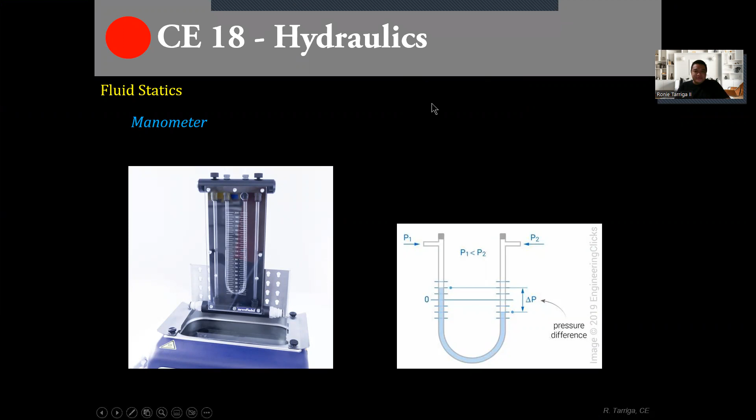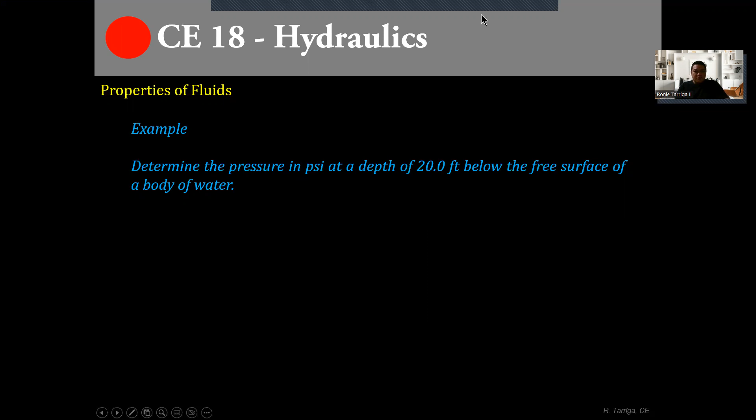Determine the pressure in PSI at a depth of 20 feet below the free surface of a body of water. Let's draw this. Suppose this is the free surface, and we take this point here, which is 20 feet down. This is our point, point 1.

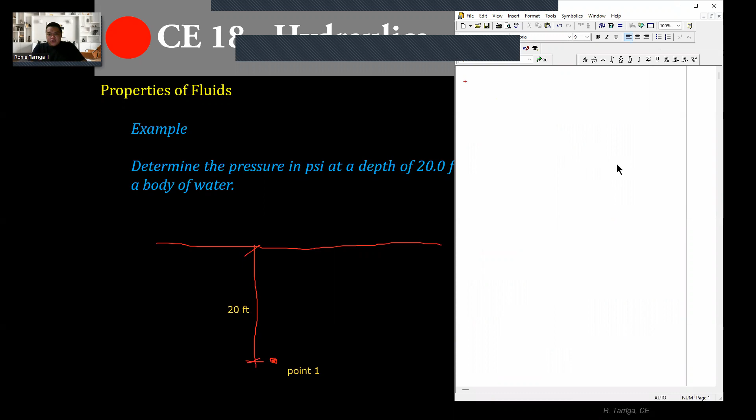Example 1. Determine the pressure in PSI. Come on, this is easy right? Pressure equals gamma times H, that's the formula.

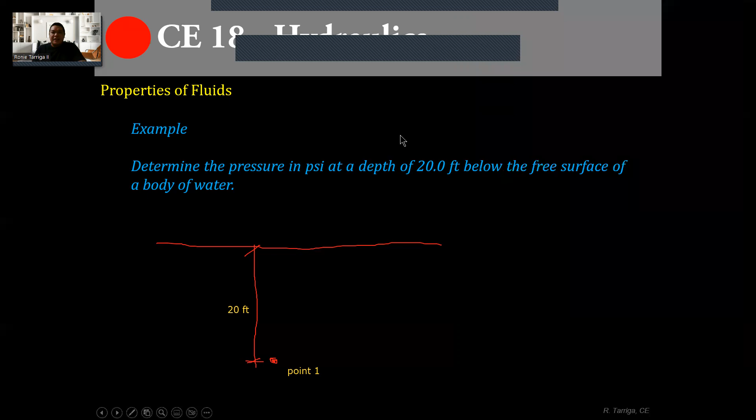Next: Determine the pressure at a depth of 9 meters in oil of specific gravity 0.75. B, find the absolute pressure in PSI in problem 2.3, when the barometer reads 29.9 inches of mercury, specific gravity 13.57. Example 2, let's put down the given.

For letter A, we need to get the pressure at a depth of 9 meters in oil of specific gravity 0.75. We can also draw this. Pressure formula is gamma times H. So H here is 9 meters.

For the gamma, we don't have it directly, but we have specific gravity of oil, 0.75. Where do we use this? If you remember, the formula for SG is the unit weight of the liquid over the unit weight of water. We use this to get the unit weight of oil, which equals specific gravity times the unit weight of water.

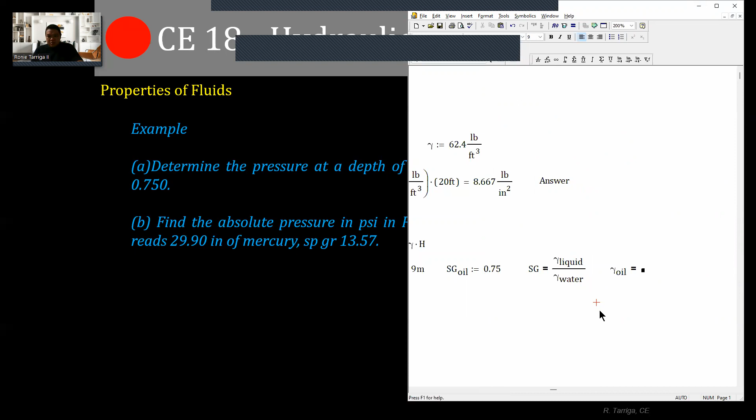Based on that, the unit weight of oil is the product of specific gravity times the unit weight of water. And you should remember the unit weight of water equals 9.81 kilonewton per cubic meter.

So let's use the formula. Specific gamma of oil equals SG of oil, 0.75, times unit weight of water, 9.81 kilonewton per cubic meter. Let's express it in kilonewton per cubic meter for now.

So now, determine the pressure at a depth of 9 meters using this formula. Pressure equals, for oil, unit weight of oil which is 7.357 kilonewton per cubic meter, times the height of 9 meters. Let's express this in kilopascal.

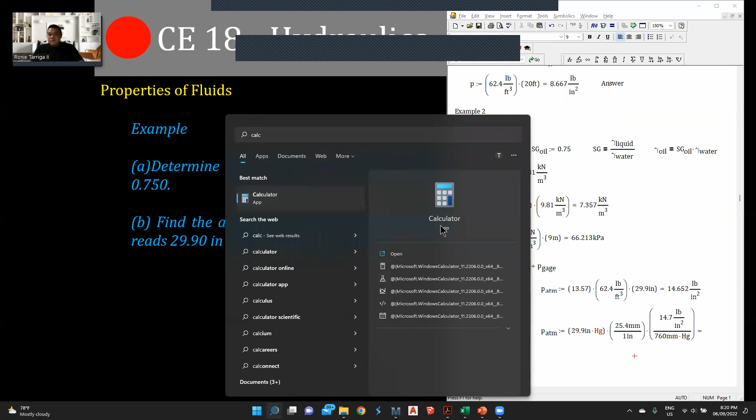Wala man tayo scientific, so i-multiply na lang nato tanan na sa numerator, divide by 760. 29.9 times 25.4 times 14.7 divided by 760. O di ba? 14.689, so paano na siya? Most likely, same. Equal to 14.689 pound per square inch.

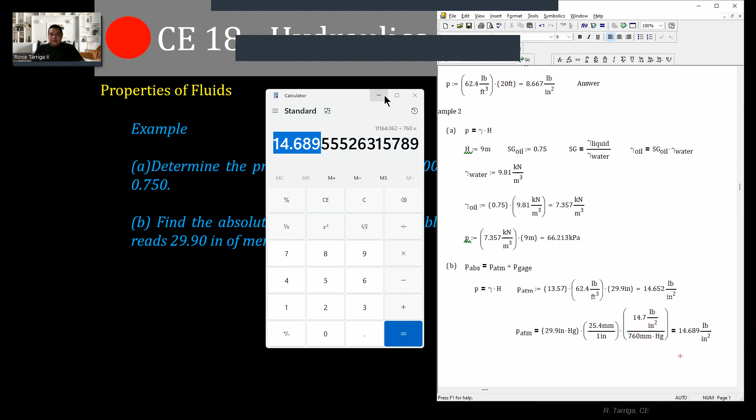Pwede lang ko din na. Okay, so kanina lang ito gamiton, kaning 14.65, same lang din na siya. Gamiton na ito na yung formula. So P absolute equals to P atmosphere, kaning let's say 14.652 pound per square inch plus ang gauge nga 66.213. So dapat PSI man, convert na to.

Kilopascal times, di ba, if remember mo, 101.325 kilopascal. Ay sa ubos pala ni para mag-cancel, equals to 14.7 psi. So guys, oh psi na siya, pound per square inch. Yun, amo na answer, easy.

Kaya na kayo. Sige, next.

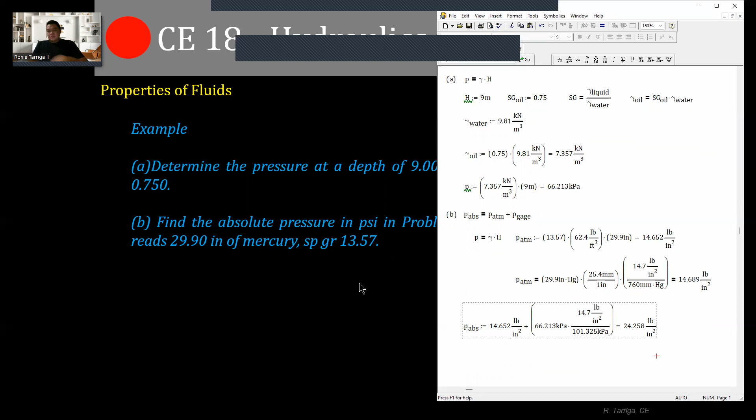Okay, so if the atmospheric pressure is 0.9 bar absolute and the gauge attached to the tank reads 390 mmHg, what is the absolute pressure within the tank? Oh, atmospheric 0.9 bars, gauge attached 390 vacuum. Ano lagyan po niya? Sample number 3.

So same formula, P absolute equal to P atmosphere plus P gauge. So this time, ang atong P atmosphere equal siya to 0.9 bars. Okay? Yung atong P gauge equals to negative siya kay vacuum, 390 mmHg. Let's say kung ano, P gauge equals to 0.9 mmHg. Wala, formula na siya.

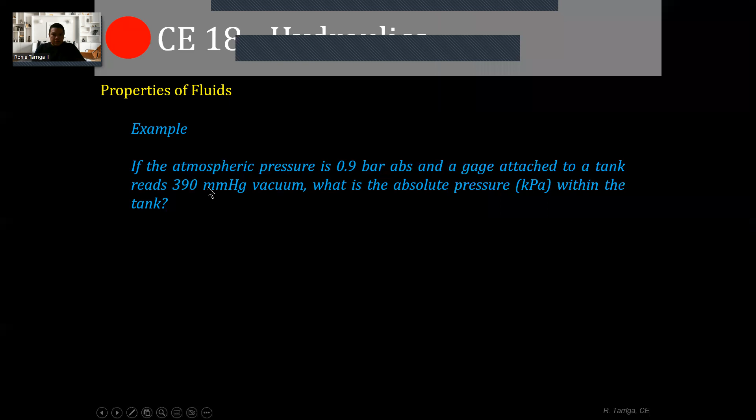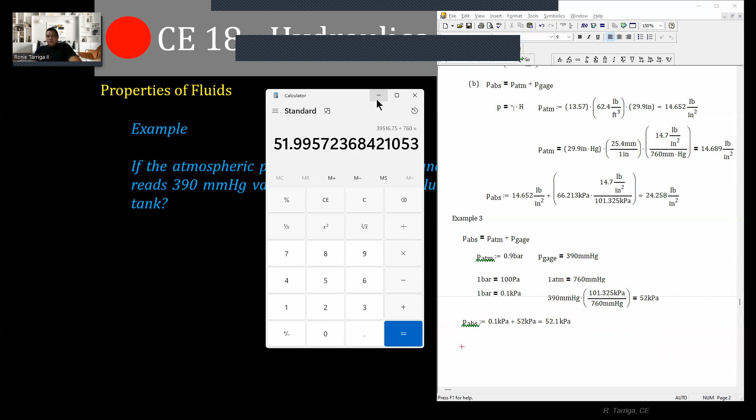Sige, 390 times 101.325 divided by 760, 52. Add lang nimo. P absolute is equal to that would be 0.1 kilopascal plus 52 kilopascal. Ano yan sir? 52.1, kasi yun, di ba? Easy, next.

Sige be, kani daw. Sige sorry no, akong so sige kani. A pressure gauge 7 meter above the bottom of a tank containing a liquid reads 94.94 kilopascal. Another gauge at height 4 meters high reads 87.53. So compute the mass density of the fluid.

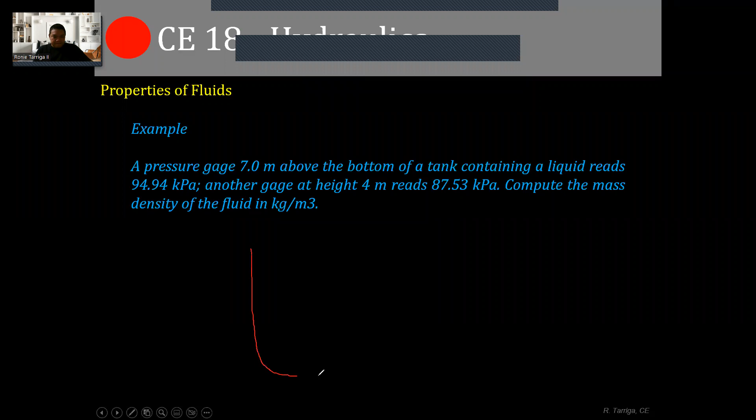Ay dali ni siya, suppose tank. Drawing the tank. So mayong kag height dapat gikan diri na measure no sa ubos. Diri ang reference point 0. So from height of suppose una na to ni height 4 meters. Tama? A pressure gauge above the bottom of the tank. Ano?

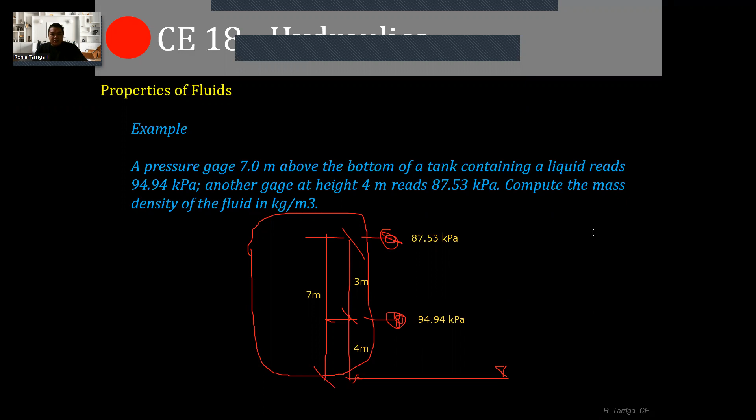Sample 4. This is density of fluid. So first, let's get delta P. Delta P is equal to P1 minus P2, so P1 should be greater than P2. In this case, delta P equals pressure 1 which is larger, 94.94 kilopascal minus 87.53 kilopascal. So that gives us delta P.

Remember that pressure is equal to gamma times height. So we have the height here as 3. The pressure is in between this, this delta P. So in this case, delta P is equal to P. Let's get that - height is 3, okay.

So to get gamma, or the unit weight of this fluid, it's equal to pressure over the height. So gamma fluid is equal to pressure, 7.41 kPa over 3 meters. So that is in kilonewton per cubic meter. But since we need density, we need to convert it. Actually it could also be in kilogram, but that's not needed here, we convert it properly - just divide this by g.

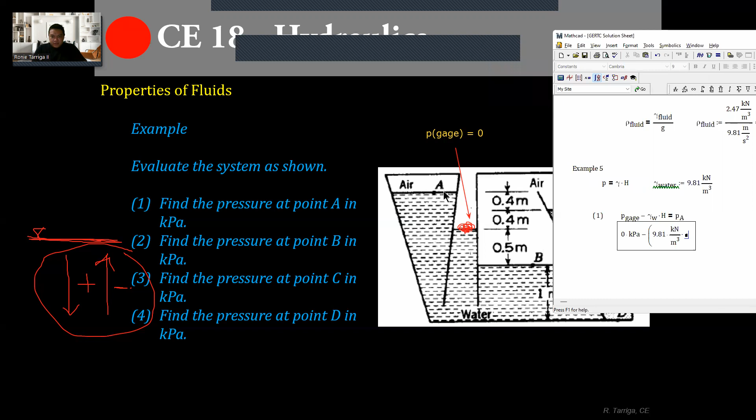So that would be gamma H, gamma water times H. What's that equal to? The pressure at point A. Or for equilibrium, you can set it up as - or minus PA equals 0. But nonetheless it's the same. Substitute - gauge pressure is 0, minus unit weight of water, 9.81, times the height. The height is - we see it here, height. From here going to A, that's 0.4 plus 0.4, that is 0.8 meters, is equal to PA.

Okay, so calculate - PA is equal to what? Calculate, do the direct calculation. That would be 9.81 times 0.8. So that would be 7.848 kilopascal. What's the pressure at A? Okay, so it's pressure times height. So now we've established the pressure at A.

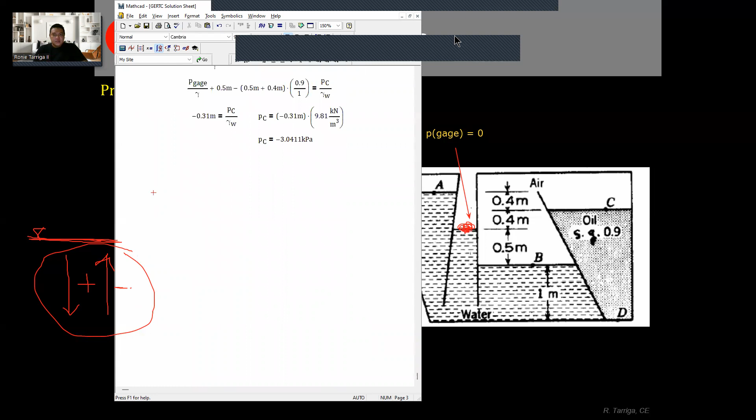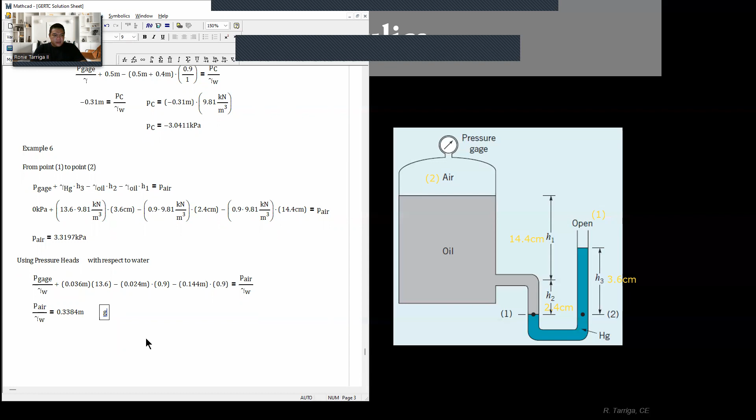That would be 0.3384 meters. Now let's get pressure of air by multiplying: unit weight of water times this, 0.3384 meters times 9.81, giving 3.3197 kilopascal. Same answer as before.